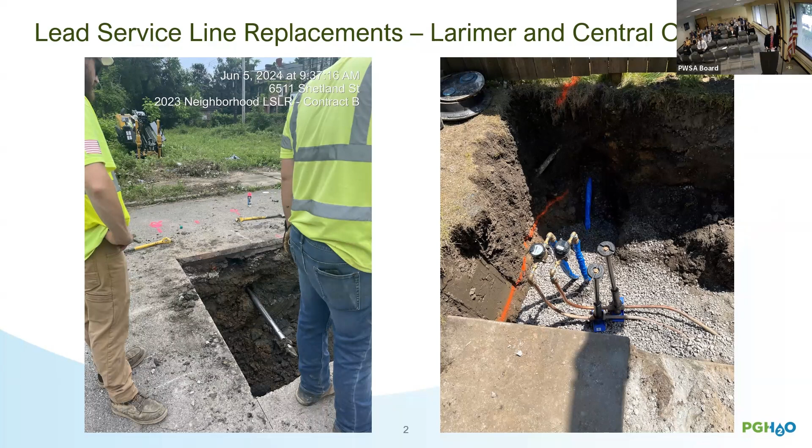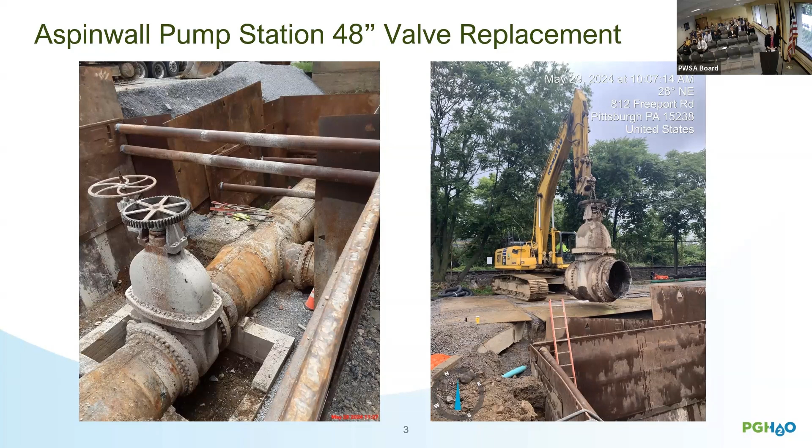Next slide, please. The work included the installation of the new valve, which you can see in the middle and right photo, 3 custom fabricated steel to ductile iron transitions, various ductile iron fittings, and approximately 1,000 bolts for all of the connections, some of which you can see in the right and middle photo.

And in the left photo, you can see that the old piping had been removed, and one of the steel to ductile iron transition fittings on the right of that photo has been welded onto the existing steel line on the far right. This entire pump station was shut down for approximately 3 weeks during this work and subsequent startup, and this required quite a bit of extensive advanced planning from operations and engineering.

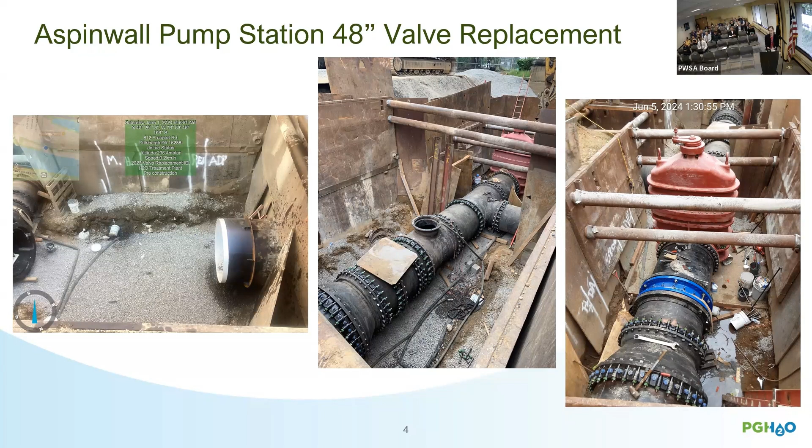And I think it's safe to say that everyone is relieved that this work was completed without any major issues. Next slide. So these are just some interesting photos that I thought I would include. On the left, a little hard to see, but it's a piece of the old riveted steel that was removed, and there's some stamping on it. It says Carnegie with some numbers. We don't know what those numbers mean, unfortunately, but it's still interesting to see.

And on the right, clearly an old photo. This is the installation of the 60-inch Lanpher rising main. Unfortunately, don't know where that picture was taken, but thought it was a great picture to share. Next slide, please.

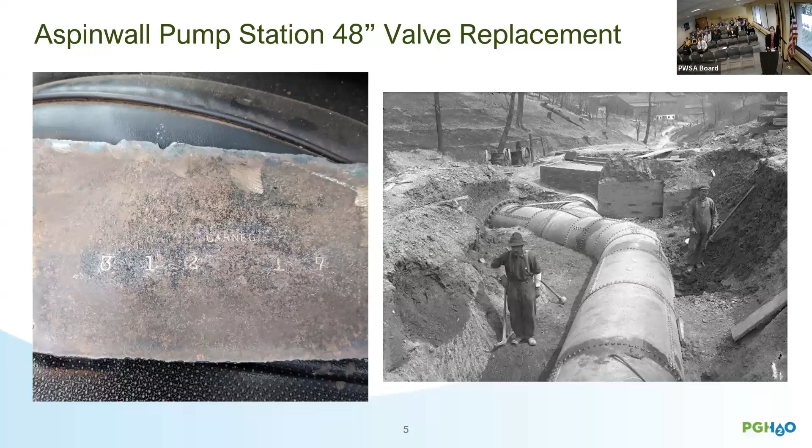Next project I wanted to share is what we call the sludge chamber project at the Aspinwall treatment plant. This project has numerous components, and importantly, one of them is replacing the pumps in the wet well, which we also call the sludge chamber. And this receives clarifier residuals, aka sludge, during clarifier draining or maintenance.

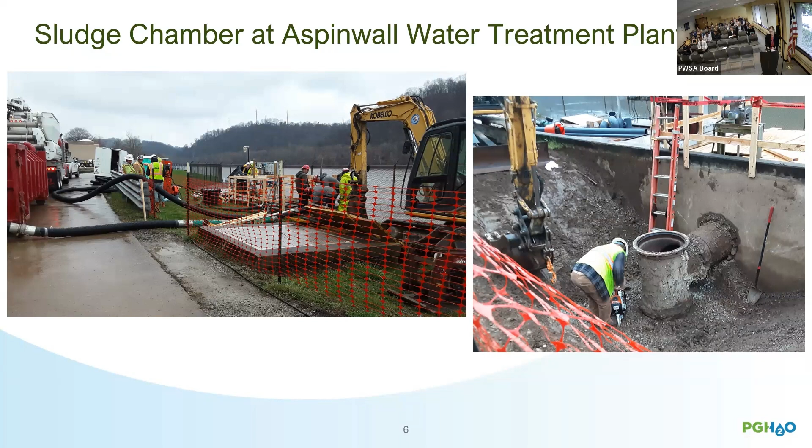Next slide, please. The photo on the left, much of the demolition work had already occurred, and the opening from the chamber to the river outfall is being sealed.

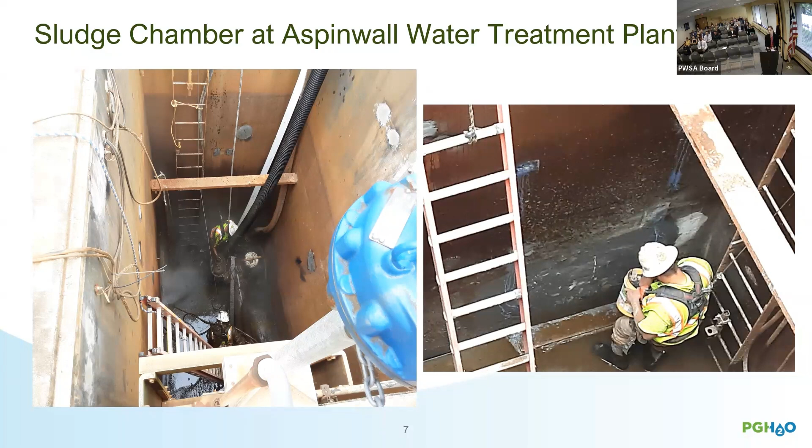So you may recall last month I mentioned that as part of this project, we reached a milestone in that the outfall to the river was permanently sealed as a requirement of our administrative agreement with EPA. So on the right, you can see this is the permanent seal, the physical filling of that hole with concrete is shown. It's a little hard to see, but that photo on the right is what's being shown there.

Next slide, please. Rachel, can I ask what's probably a really stupid question?

If it's sealed to the river and capped on the other end, does that mean that segment of pipe has no purpose anymore? Right, so that segment of pipe from that chamber to the river would no longer be used, because we don't want any chance that those residuals can make it to the river. The residuals will be pumped out and properly discharged to the Alcosan system.

Next is our Highland Reservoir pump station. For the next three slides, I'll show the progression of the work at this pump station, located adjacent to our Highland 2 reservoir. You can see the initial excavation on the left, which is the 16-foot depth.

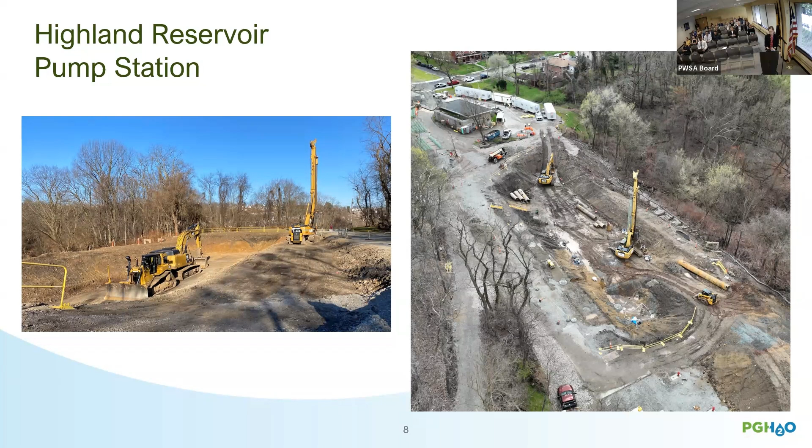On the right is some drone footage. You can see the existing Highland Reservoir pump station towards the top of the photo, and then the full extent of the excavated area. This photo was taken during the installation of the foundation caissons.

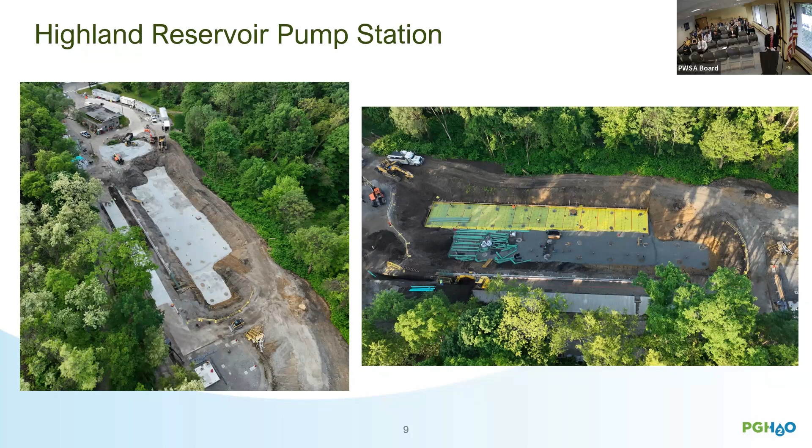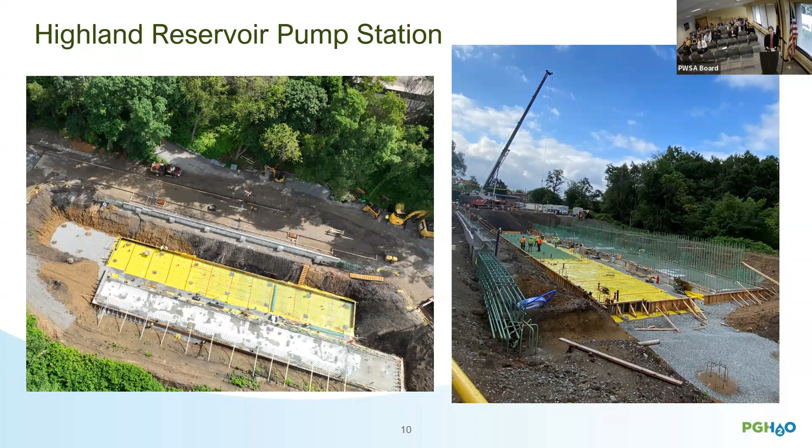So as previously reported, this project continues to progress on schedule. Next slide.

This is a stormwater improvements project in the Stanton Heights neighborhood, the Dragoon Way project. It was initiated due to complaints of multiple overland flooding events that had been increasing in frequency and severity. The project consisted of installing three large underground stormwater storage tanks, all located within public rights of way. This is a joint cost share project with the city of Pittsburgh.

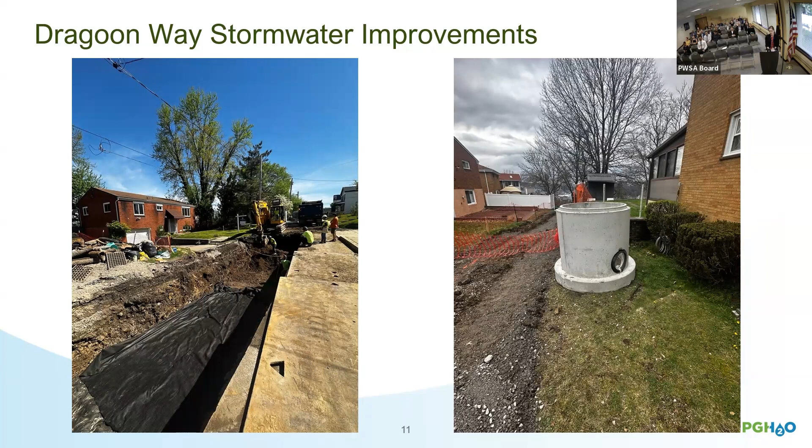The left photo shows the excavation for one of the stormwater tanks on Adelphia Street, and the photo on the right shows a manhole section with an outlet control structure. This project is expected to be completed in mid-August. Next slide.

I included this because, as you may recall last month, I mentioned that our 2020 large diameter sewer rehabilitation project won a National Engineering Award. This is the exact same type of material that was installed on that project.

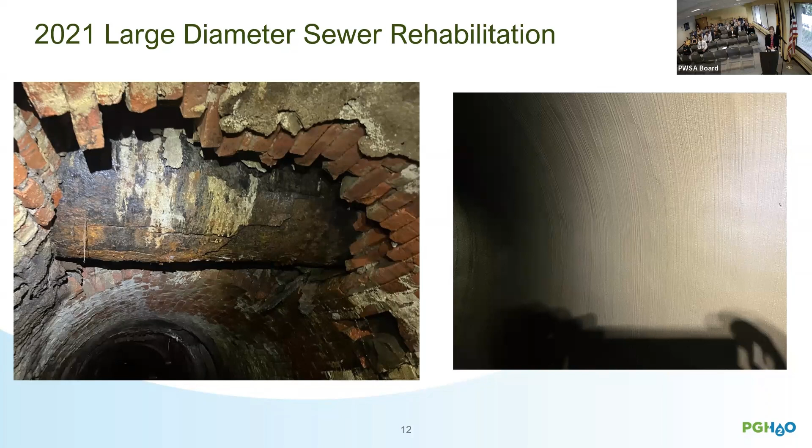Next slide. Can I ask what year was the original rising main installed, approximately? These rising mains were installed in the early 1900s. Anyone who knows better, feel free to correct me, but I think that's about the time frame.

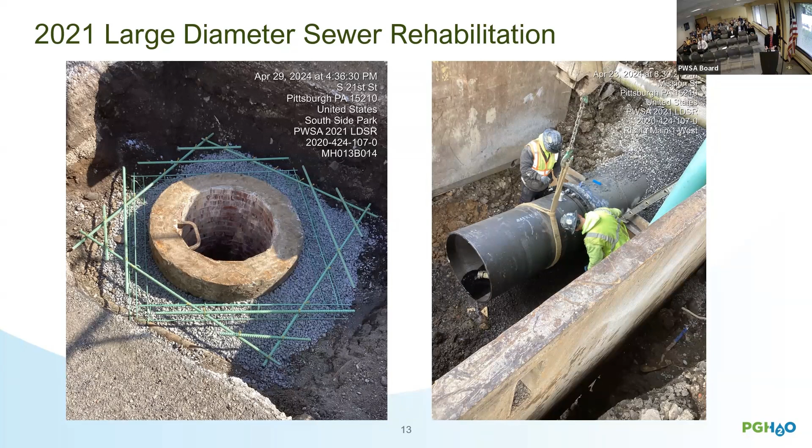This area was evaluated by a geotechnical engineer and ultimately filled with aggregate. The sinkhole happened this spring and the yard is now completely stabilized, and the owner, I'm told, is happily mowing their lawn.

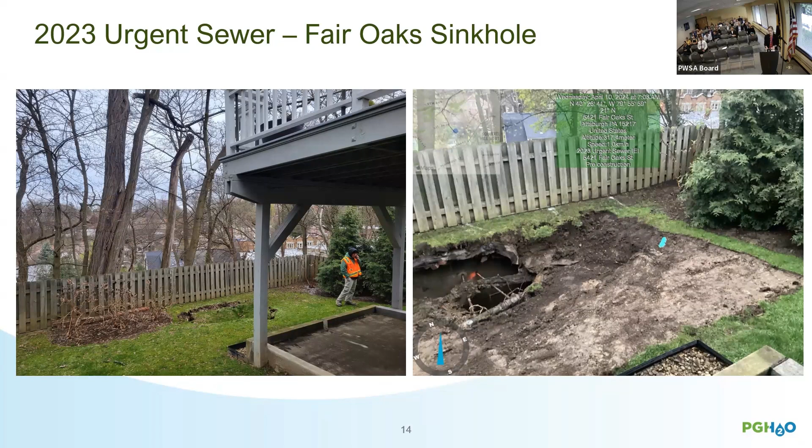Currently, the only item remaining on this project is final paving.

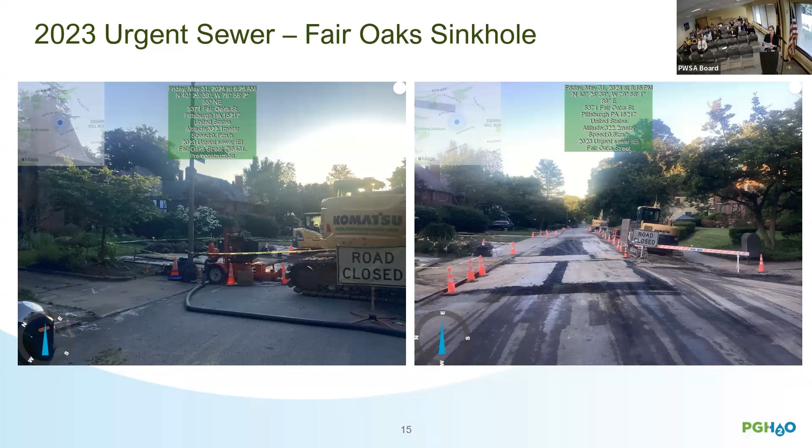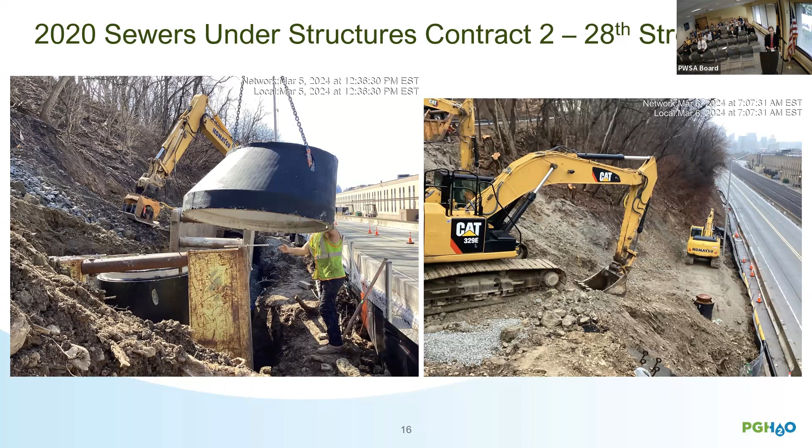This is the last project I'll be showing here: the 2022 large diameter sewer rehabilitation in Kelly Street. This project consists primarily of installing new and replacing deteriorated manholes. What makes this project challenging is the sheer depth of the sewer. These next photos will show the complexity of replacing a manhole at a depth of about 40 feet to the bottom of this brick sewer.

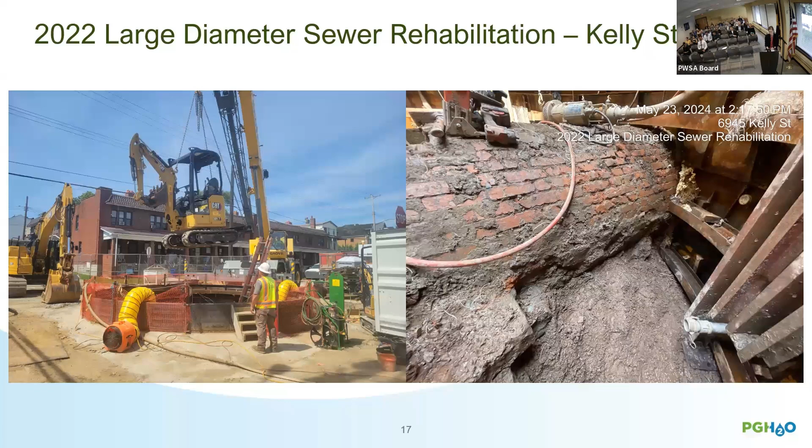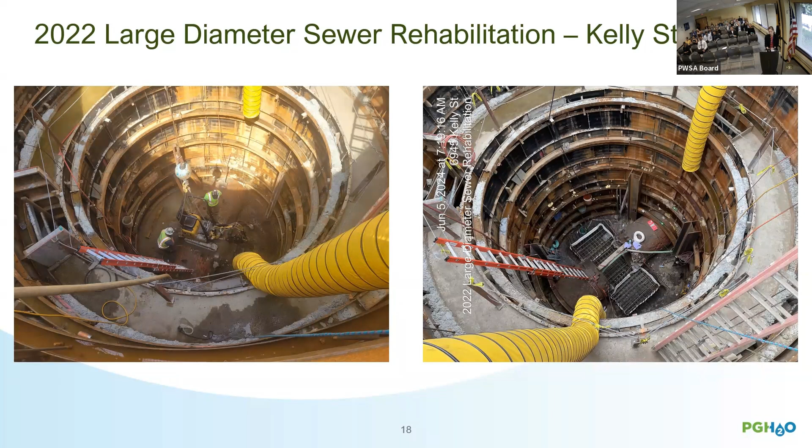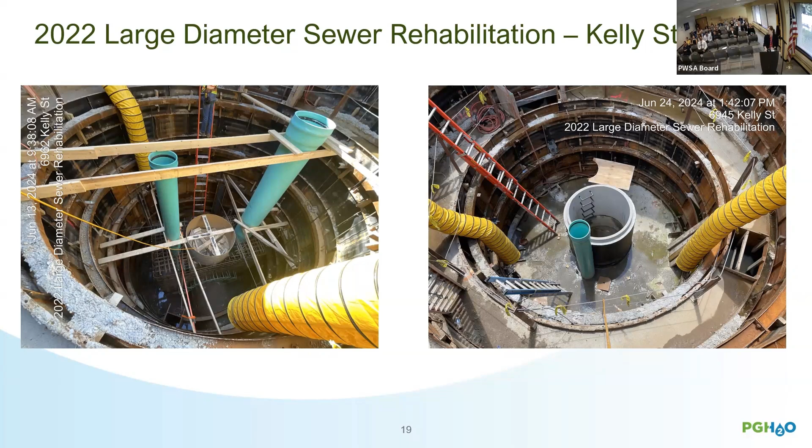Moving on to requests for qualifications. As mentioned in my recent reports, PWSA has been conducting a request for qualification process for new on-call consultants, and we're pleased to announce that selection process is complete. Next week, our procurement department will be sending notification letters to the vendors to begin the process of executing master service agreements. In the meantime, we have available here at the meeting a handout of the list of consultants who were selected for each category.

Consultants who were not selected will have the option to request a short debrief by category. Please note that debriefs will not be offered to consultants who were selected for a given category.

I'd like to thank all of the 57 vendors who took the time and effort to prepare and submit qualifications. I also want to thank PWSA's procurement department, especially Felicia Meza, for expertly facilitating this process. I want to acknowledge the 17 employees in the engineering and construction department who spent many hours carefully reviewing the 140 proposals that we received. And last but not least, our Deputy Director, Pete Meckler, deserves special recognition for leading the entire process from beginning to end and ensuring that it was completed in an organized, timely, and ethical manner.

So I'm almost finished, one more update. The following engineering project is currently out for construction bid: our 2020 sewers under structure contract 1, Carroll Street rebid. Bids are due July 23rd. This concludes my report. Thank you for your attention, and I'll turn it over to the board for any questions.